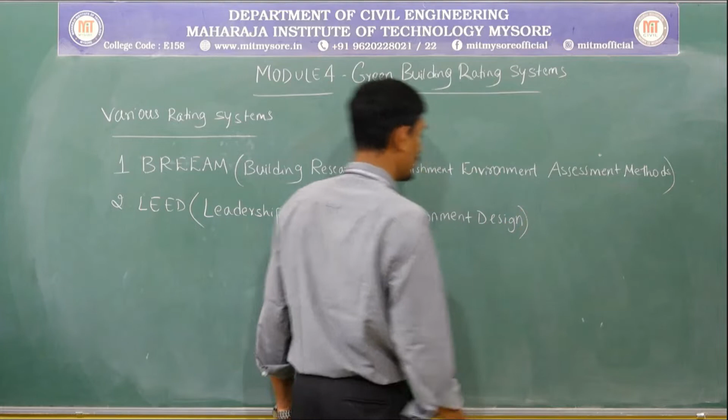Next is the very widely used assessment system in green building, that is LEED. LEED means Leadership in Energy and Environment Design. So this is the second rating system we are going to follow.

Next is Green Star. This is one more rating system we are going to follow.

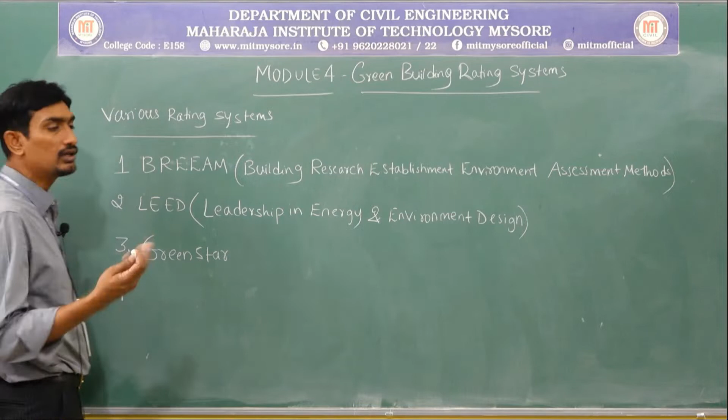These systems are globally used in green building rating. If I come to the Indian context, the rating system used is IGBC, that is Indian Green Building Council. This is the popularly used assessment method in India, and so many strategies and categories have been derived from LEED.

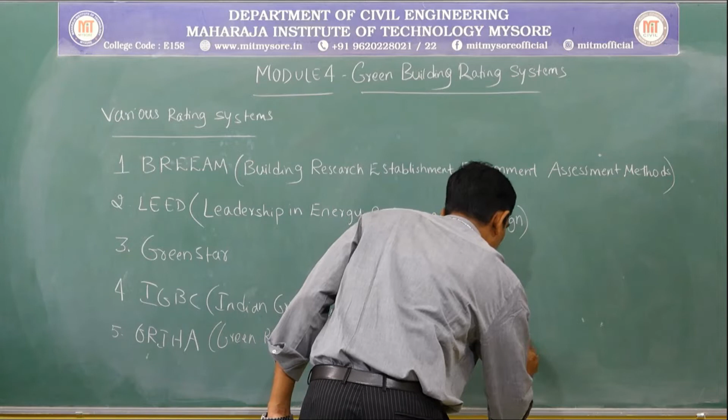The next is GRIHA. This is one more widely used assessment, that is Green Rating for Integrated Habitat Assessment. So these are the systems we are going to discuss.

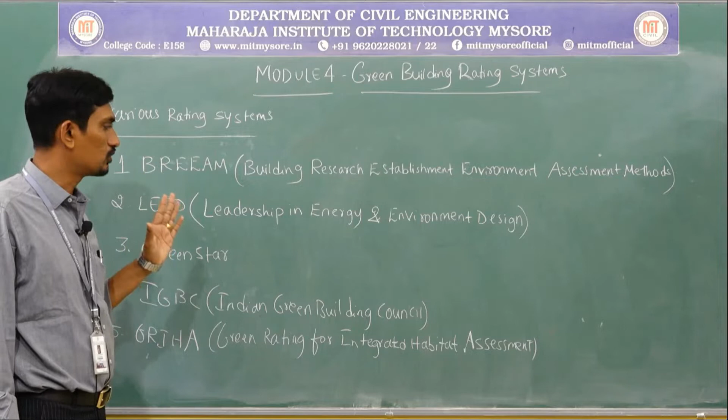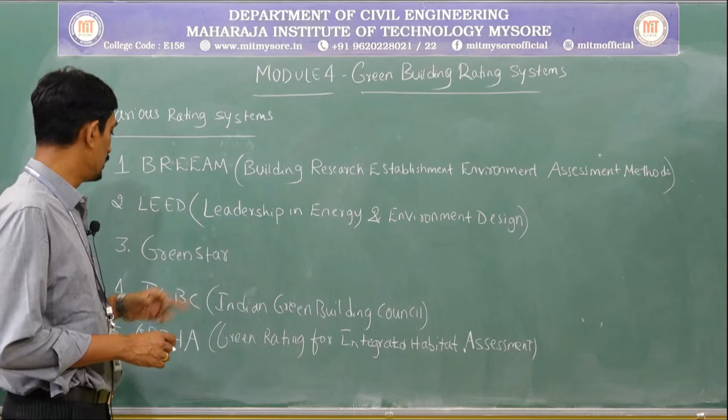The first one is BREEAM, that is Building Research Establishment Environment Assessment Methods. The next is LEED, very popularly used globally - Leadership in Energy and Environment Design, the second rating system. And the third rating system is Green Star, used in green building in some typical countries. So these three are used globally.

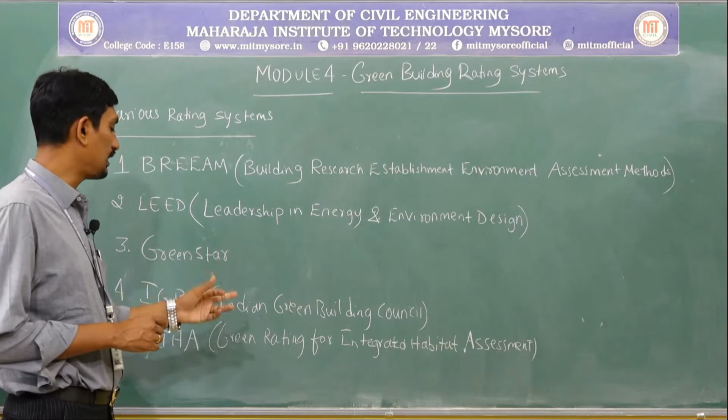Coming to the Indian context, the widely used green building rating system is Indian Green Building Council, that is IGBC. And apart from this, the one more rating system we use is Green Rating for Integrated Habitat Assessment, GRIHA. So these are the five rating systems I am going to discuss.

In this section we will start one by one, covering the principles followed by each particular rating system. Apart from these five rating systems, there are other rating systems used in other countries, like CASBEE, which is used in some other country. In Japan also they use some other standards, Japan standards. So various countries have adopted various rating systems.

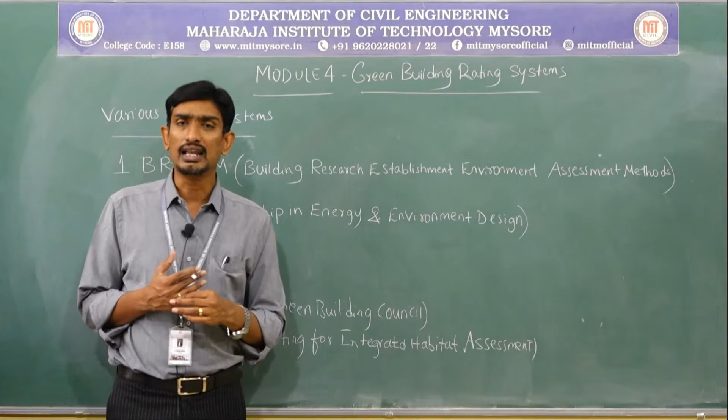The categories used to rate green buildings are classified differently, slightly changing from one rating system to another. But in general, all rating systems follow the same categories - water efficiency, energy efficiency, ecology, environment, waste management, and so on. But they are bifurcated with respect to their countries so they can rate the green building. We will discuss the categories one by one for BREEAM, LEED, Green Star, and IGBC, and how they rate the green building.

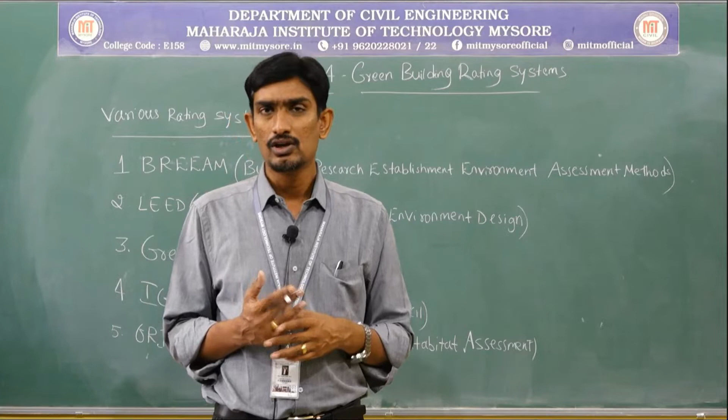So now let us discuss one by one what all the things about the rating system are. We will start with the first one.

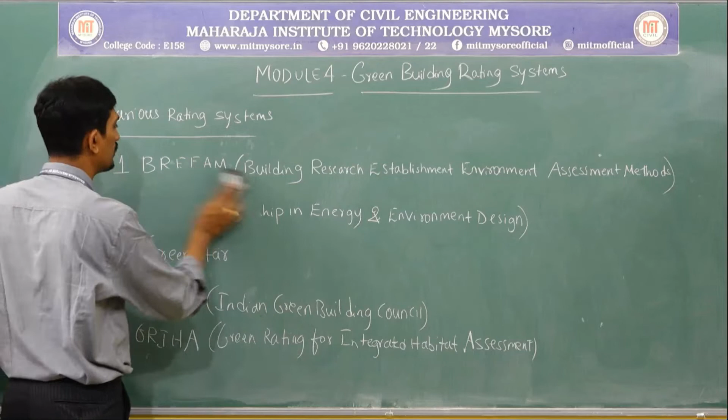The first rating system I am going to discuss now is BREEAM. This BREEAM was launched in 1990 by BRE, which means Building Research Establishment. They have adopted this rating system.

BRE is a world leading, multidisciplinary building science organization.

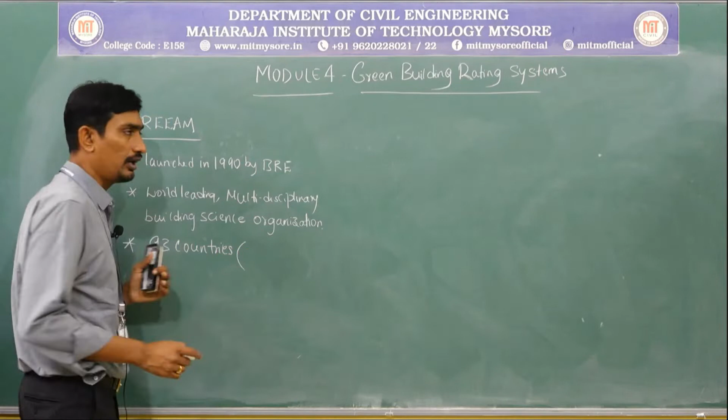This BREEAM is popularly used in various countries, almost 93 countries follow this rating system. In particular, the popularly used countries are UK, United Kingdom, European Union, and other Middle East countries.

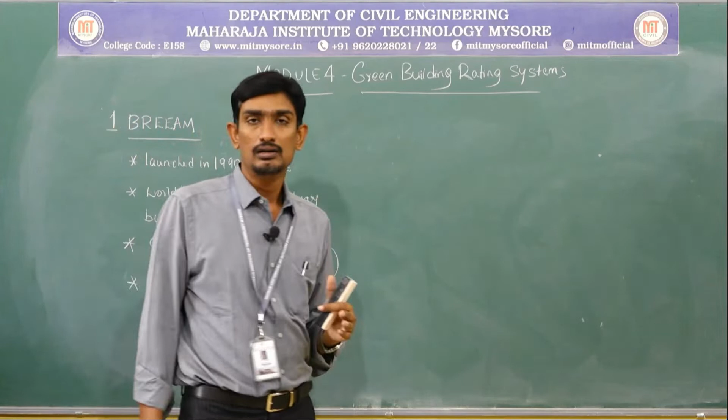Almost I can say BREEAM has rated 23,26,200 projects so far, since 1990, when they started evaluating and rating buildings. They have certified over 5,65,000 certifications. This is the amount of certification they have done.

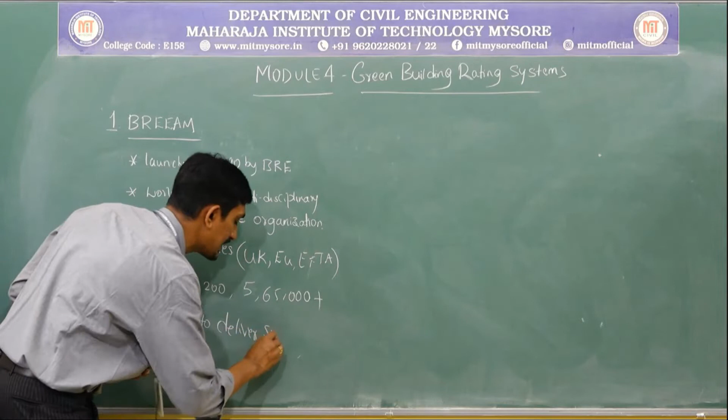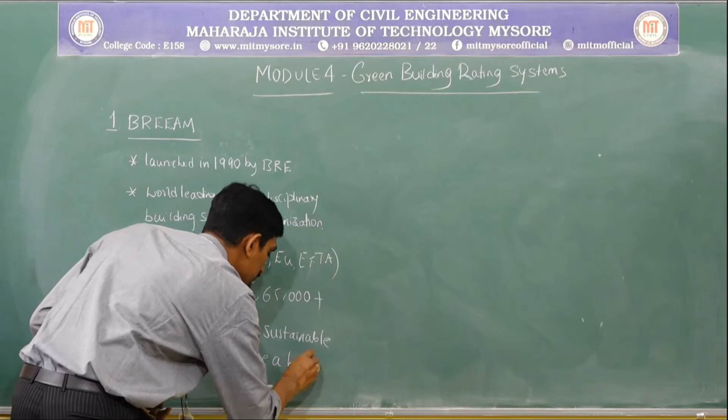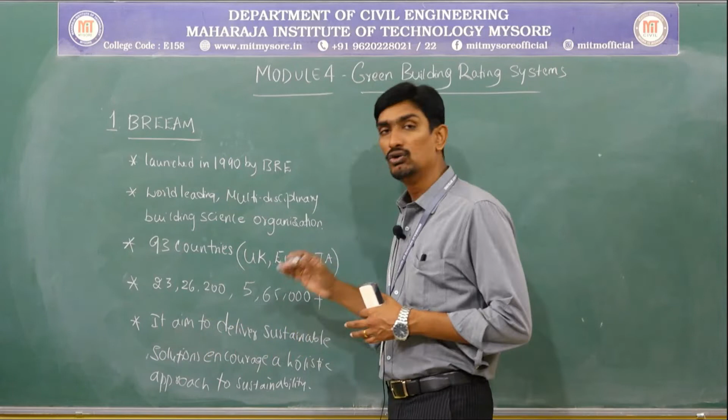Next, what exactly does BREEAM do? It aims to deliver sustainable solutions and encourage a holistic approach to sustainability, or sustainable environment. That means the BREEAM provides sustainable solutions which encourage a holistic approach to sustainability. That means I want to create a sustainable environment. When I create a sustainable environment in the building, automatically I can attain the green building concepts, and in turn rate or certify the green building in a better manner. So this is a brief introduction about BREEAM.

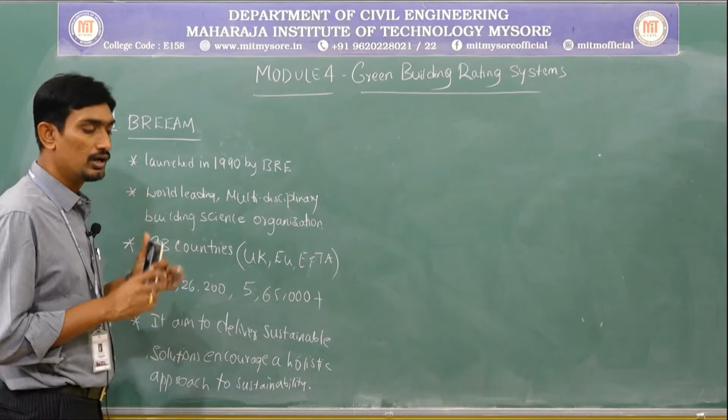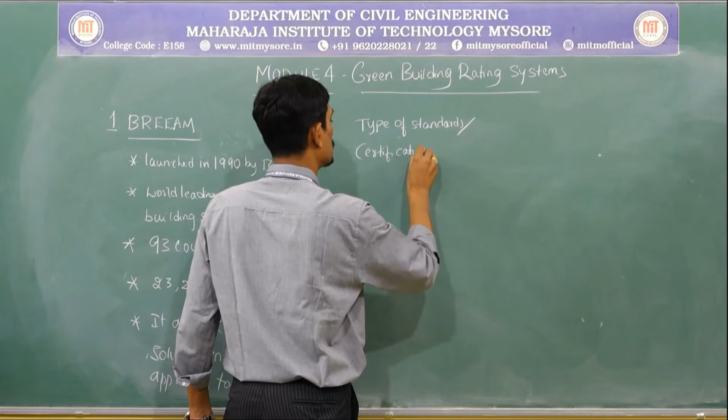Now let us look at the categories they are going to rate, and the different certification levels. So let me go with the table. They are going to classify the whole system into standardized types of standards, certifications, or rating systems. So this is the table.

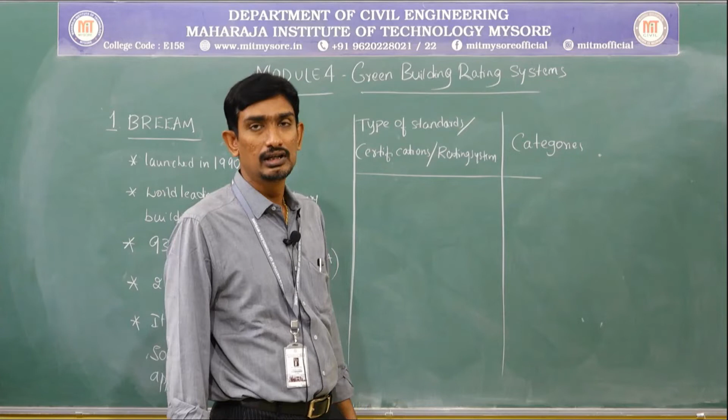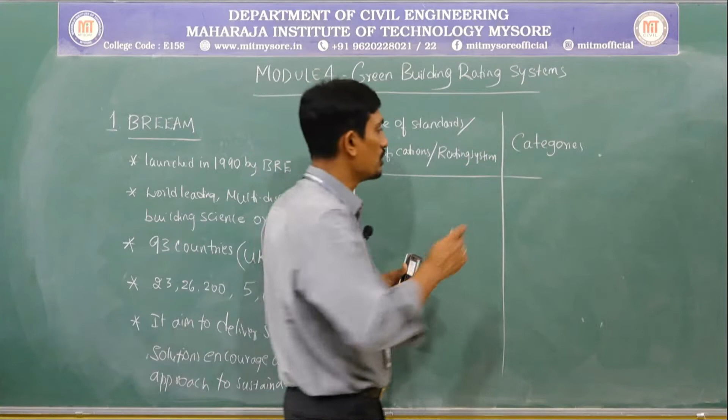Next, categories - this is very, very important. What are all the categories, or the criteria discussed in the last session - multi-criteria assessment or single attributes, categories, or various levels. What are the categories I am going to look at in order to certify the green building?

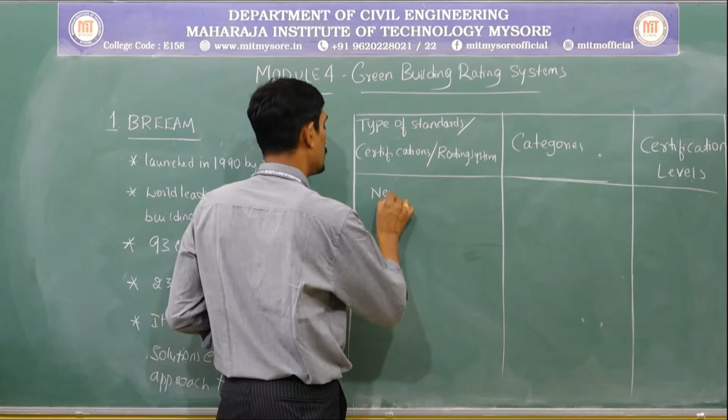Next, certification levels. What are the various certification levels? Usually the type of standards or rating systems we look at are: new constructions, new communities, in-use buildings, eco-homes, retails, courts, education, healthcare, offices, even prisons - that means jails. So whatever the purpose, we are looking into the concept of sustainable environment everywhere, creating a sustainable environment. So in that perspective, these are the various levels we look at in order to rate green buildings.

Next thing is categories, starting with energy and water efficiency - this is the first attribute I am going to look at. Next, internal environment. The very simple principle we follow here is: better the internal environment, better for the occupants. Better internal environment inside the building means occupants can feel comfortable - comfortable means they need not switch on the fan or light, they can feel comfortable inside the room. That's what internal environment means - how exactly the internal environment is inside the buildings.

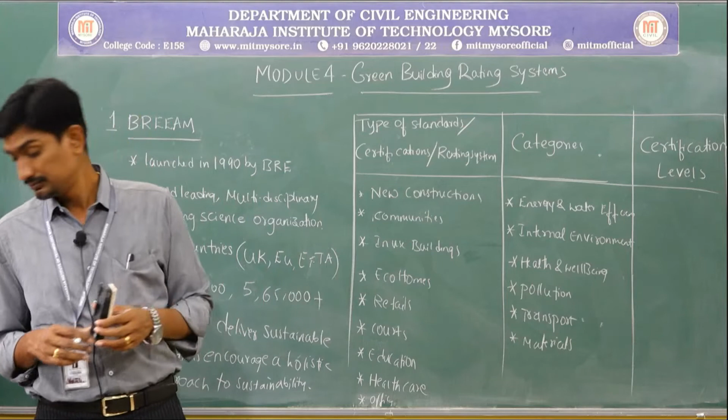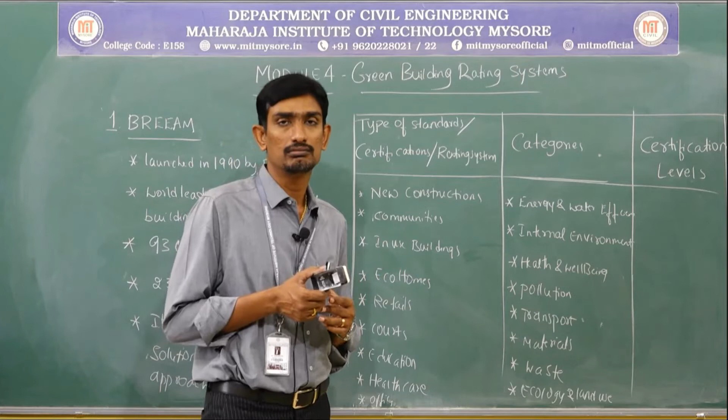Next, waste, ecology, and land use. In the last class I also stated how exactly you are going to create the boundary for the building. For example, if there is any tree on the periphery of the building, it will try to protect and reduce the heat inside the building, so that you can feel comfortable inside. Also how exactly the building has been oriented, that means the plan. So that is ecology and land use.

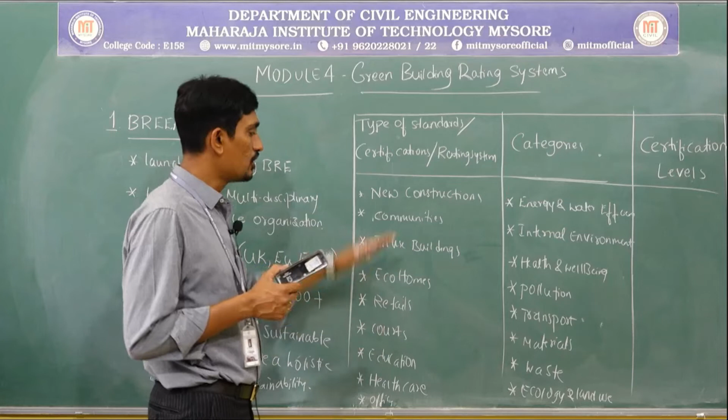So these are all the various categories I am going to look at with respect to these buildings, whether new constructions or in-use buildings, that means the buildings that will be used - eco-homes, retails, courts, education, healthcare. So in all these buildings, I am going to look at these categories. Did you get my point?

If all these categories are met, then the certification level will be better. If they are not going to meet certain standards, the certification level also will keep on reducing. So the certification level they are going to start with, the very basic level, is pass.

So they are going to certify just, okay, if you attain the criteria of some categories, then you are going to certify with pass level. Next, if something better, then I will go with good - the certification level will be good. Then if some improvement can be seen, then I can say very good - the certification level will be very good.

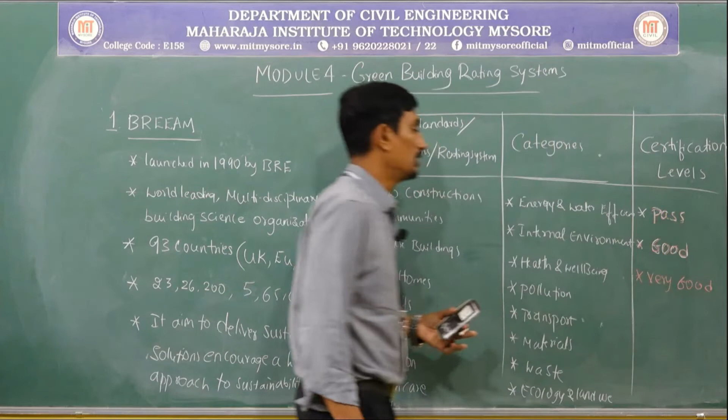Next, if still something better, then excellent. If something better than that, then outstanding. So these are the various certification levels I am going to provide with respect to BREEAM for this building, with respect to these categories. Did you get my point?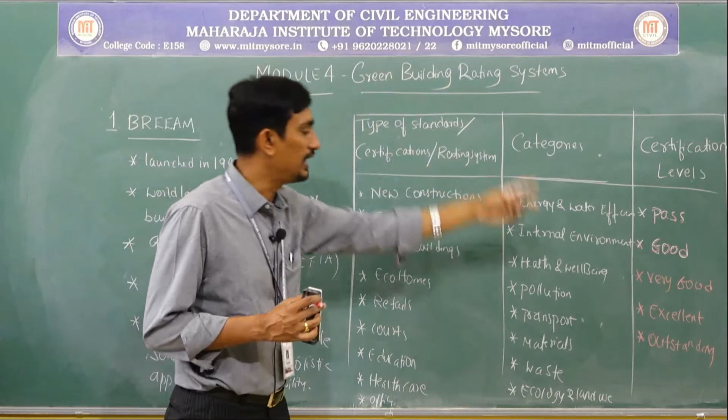So with respect to these categories, I am going to certify this building with this certification level in terms of BREEAM. BRE is the agency that has developed this table globally, that is Building Research Establishment Organization. So this particular organization has developed this.

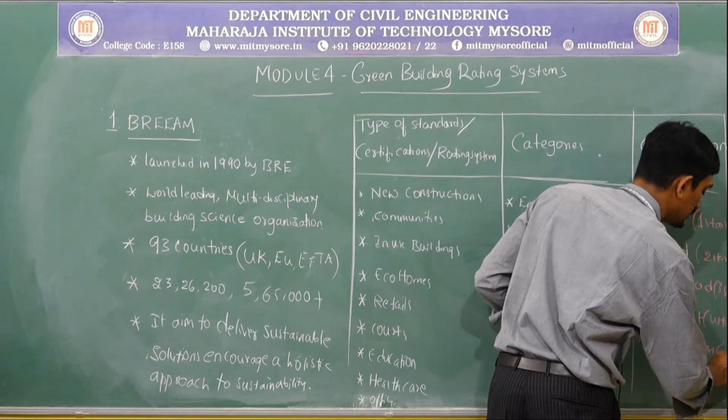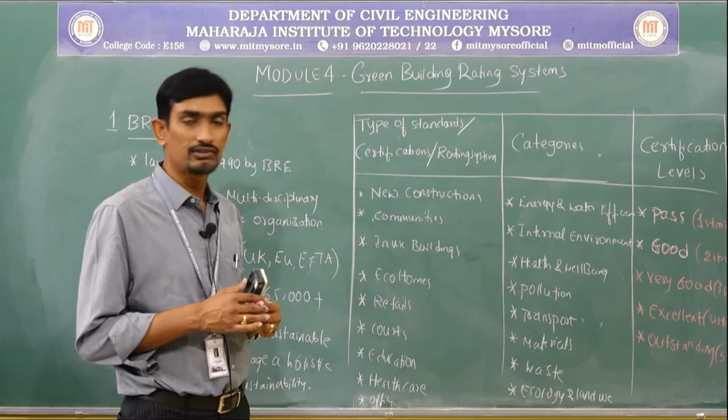Sometimes they are also going to star the certification level, like 1 star, 2 star, 3 star, something like this, 4 stars and 5 stars. So like this they are going to certify the buildings based on the BREEAM certification level. Hope the categories, the certification level, and what all things I am going to certify has been made clear. So this is about BREEAM.

Is it clear? Next, we will move on to the next rating system. The next rating system is LEED. This is the second rating system very widely used globally. Globally, many countries follow it.

Even India used to follow this LEED, though they have modified certain things and are using this rating system. LEED stands for Leadership in Energy and Environment Design.

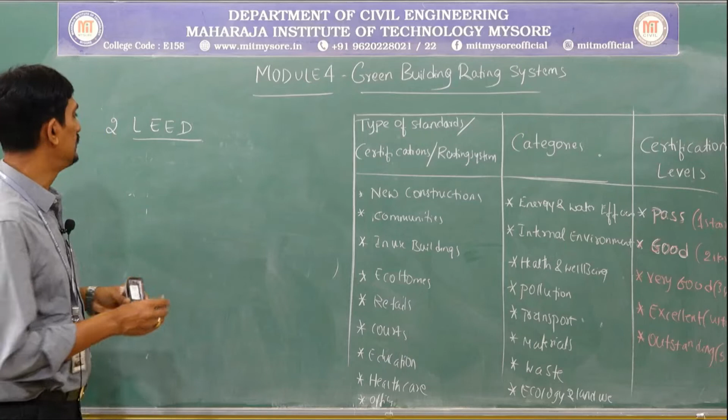This was established in 2000 by USGBC, that is United States Green Building Council. So the United States Green Building Council has developed these standards, the LEED rating system.

Next, what exactly does this USGBC do? This USGBC rates design and construction practices that continue to define green buildings.

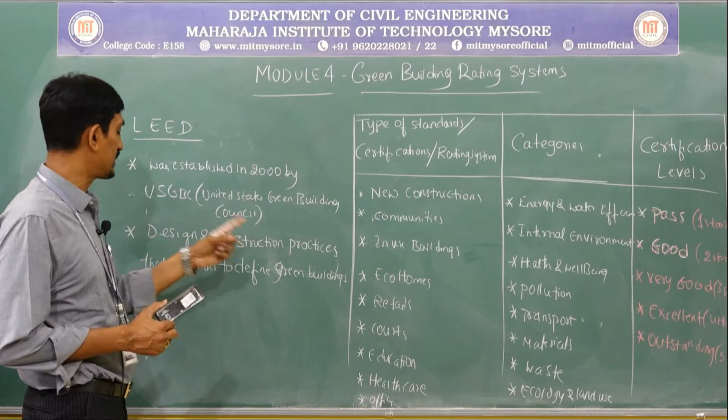This LEED, developed by USGBC, is used to rate design and construction practices that continue to define green building. That means how exactly the design of buildings has been done to meet the sustainable environment, in order to certify as green building, and how construction practices have been followed or adopted to create that sustainable environment.

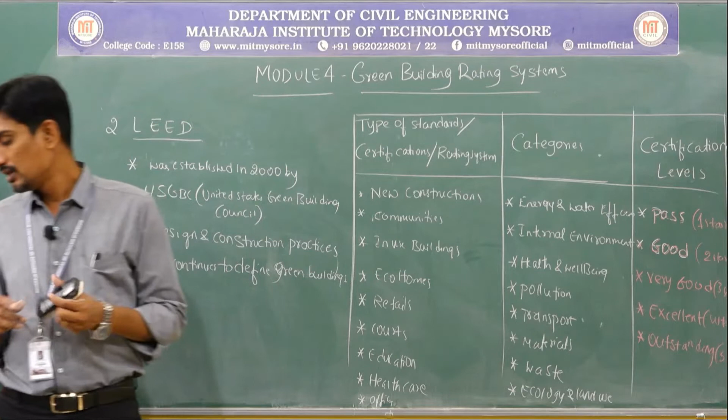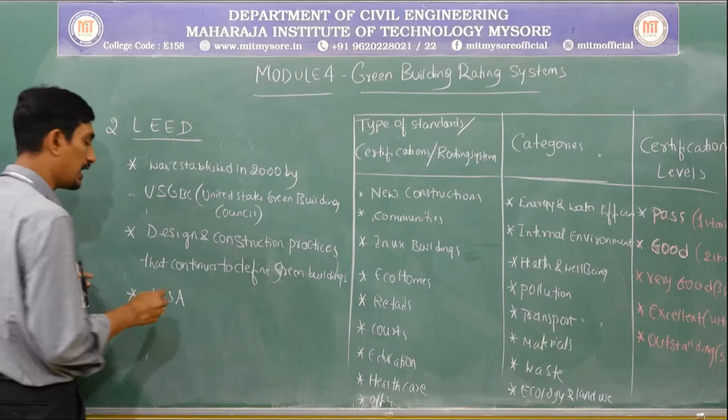This particular LEED is majorly used in the USA, in particular North America. The US Green Building Council developed this LEED, and almost 150 countries have adopted it, including India. India has also derived this LEED certification, and the IGBC, which I am going to discuss next, has its rating system derived from LEED, developed by USGBC.

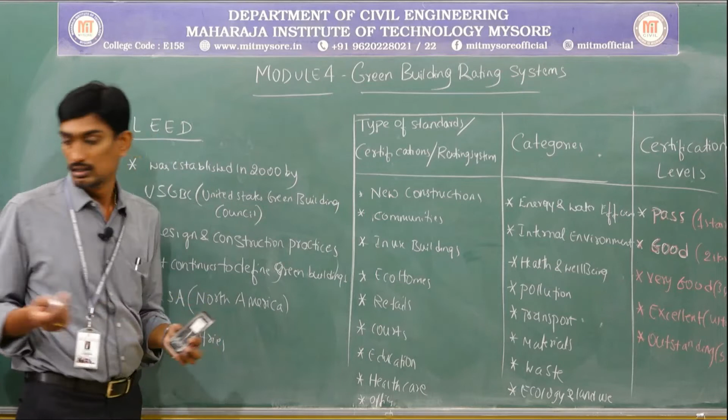Practically, almost 1,10,000 projects have been certified with this LEED certification, especially by USGBC.

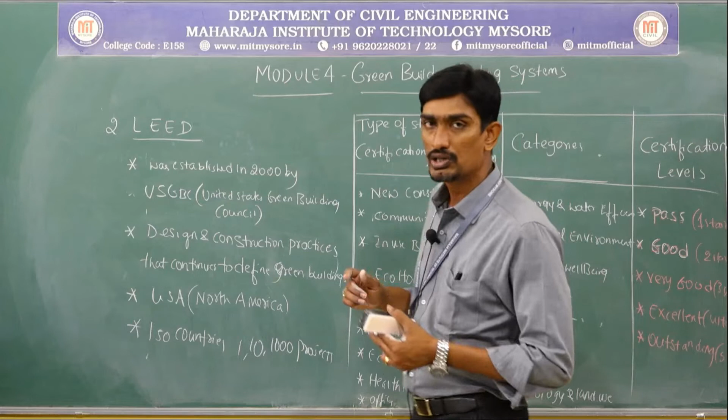One more important thing I can state is, from the latest research, almost $130 million have been kept by USGBC or USA in the budget for this LEED certification.

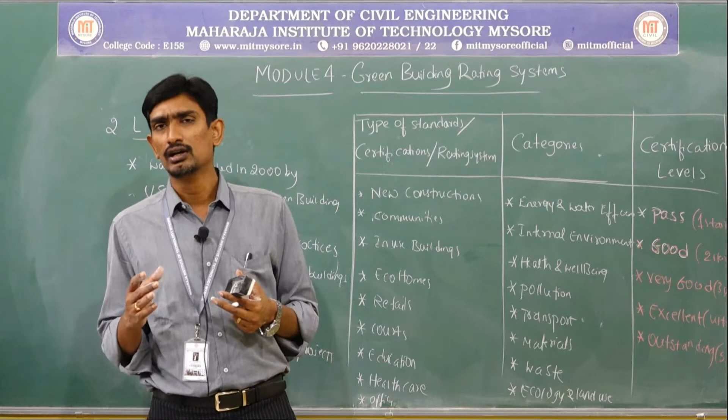Nowadays everyone is looking at how to reduce global warming and carbon emission issues, so everyone is going with the carbon footprint perspective. With this global warming reduction perspective, design practices and construction practices need to follow the LEED certification. So it is a prestigious thing for a building to get reward from the government.

So now let us go with what are the types of standards, certification, or rating systems followed by the US Green Building Council or LEED, and also the various attributes or categories and certification levels with respect to LEED. This is similar to what was stated in the earlier class, in this session also. The rating system and categories are almost in general the same, but classified with slight modification with respect to their rating system.

For example, here also new construction is one and the same. Earlier in BREEAM they used to call it in-use buildings, now they call it existing building. A slight modification, that's it. New construction and already constructed building - but in BREEAM they used the terminology in-use building. That's the modification, but the meaning is one and the same.

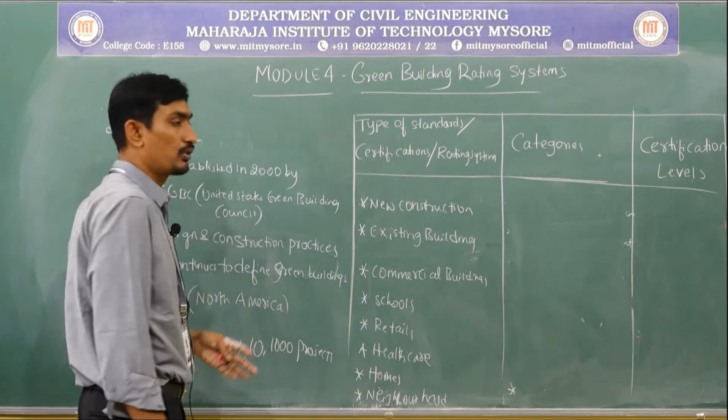In existing building, we are going to check operation and maintenance as the main thing. So type of standards in this category - LEED has been classified into new construction, existing building with operation and maintenance, commercial interiors or buildings, schools, retails, healthcare, homes, and neighborhood. These are the various standards or certification rating systems followed by LEED.

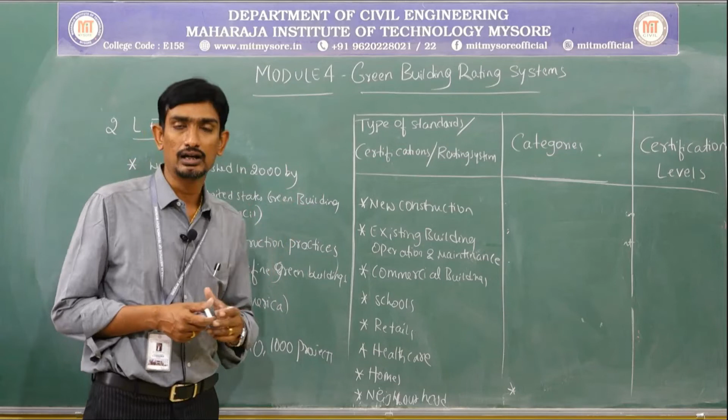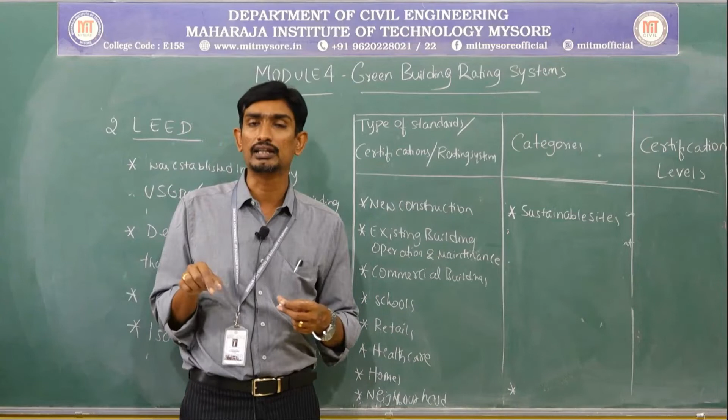Next, coming to the categories or attributes or levels which I am going to use for certification. The first category is sustainable sites - whether my boundary where I am going to construct the building is sustainable or not. That is the first perspective I look at for LEED certification. As stated in session 1, in the planning stage, from the inception itself, we need to create the sustainable environment.

When I start the assessment, from the plan itself, I look at how exactly the building has been constructed with respect to sustainable sites. The second category is the same, that is water efficiency.

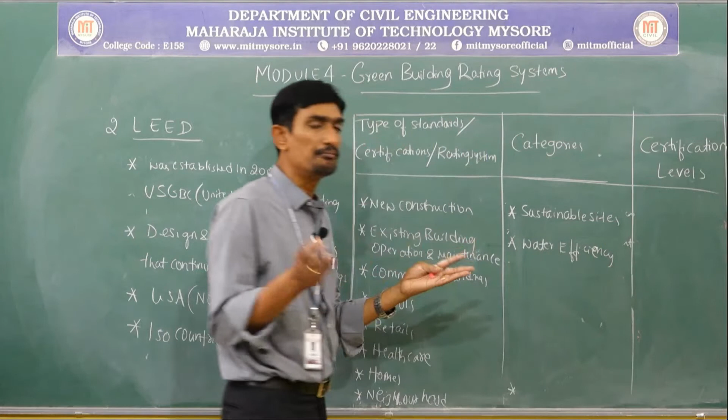Water efficiency - in BREEAM, water and energy have been combined, but here they are discretized separately: water efficiency separate, and energy and atmosphere separate. This is a slight modification. Energy and atmosphere is the third category.

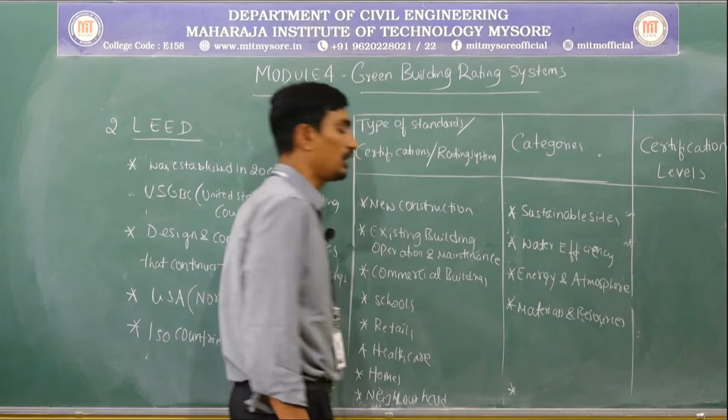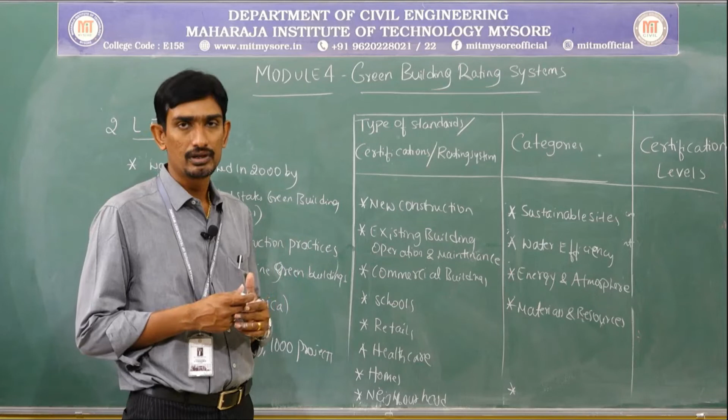Next, materials and resources - very important. I think BREEAM also states this: what types of material or eco-friendly material am I using? Am I using carbon rated materials? For example, concrete and cement - if I use a more amount of ordinary Portland cement or concrete, automatically the carbon level will be more, because concrete and cement have more carbon, so the energy level will be brought down. So material-wise we need to be conscious about what material is being used and which methodology is being used.

For example, instead of using concrete blocks or bricks - I think in module number 2 you have read about it - a very eco-friendly material is stabilized mud blocks. But people don't have confidence to use it. We need to create awareness among people about such situations, so that we can go ahead with it.

If you go with this perspective, only then can we attain a sustainable environment or reduce global warming. Otherwise it is very tough to live. I hope you have observed these days that because of this, majority of climatic changes are happening.

In newspapers they have written about the more amount of climatic changes or variations - in winter season you will feel the summer, in summer season you will feel the rainy season. These climatic variations are happening because of global warming, which is due to enormous liberation of carbon into the atmosphere, deforestation, and all these things. With this context, we need to modify the perspective of our thoughts and go with creating the sustainable environment.

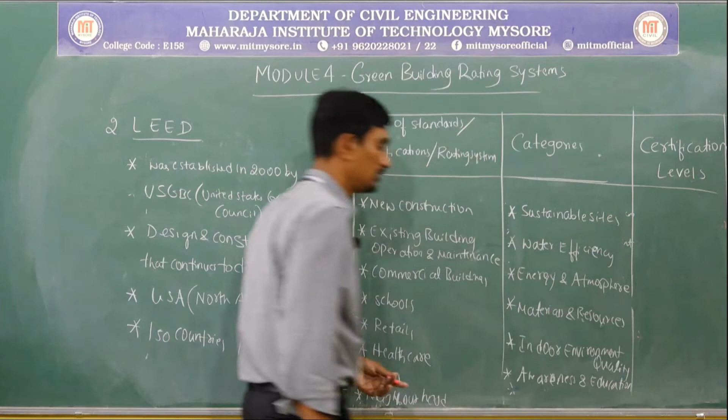Next, awareness and education - this is another thing. How aware are we of creating the sustainable environment - awareness and education. Are you aware of these green building aspects or concepts? Are you educated enough to go ahead with these green concepts? This was not there in BREEAM, but LEED used to follow this. Creating awareness and educating is one criterion - something like an oral examination to the people who have constructed the building. If I am a certified fellow from LEED, I ask questions to the person or organization that constructed it, about what materials were used, whether they are educated or aware of these things. That is what awareness and education means.

Next, innovative design.

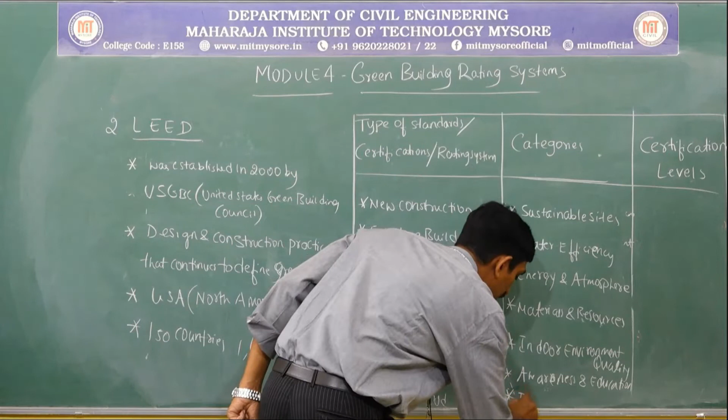What innovative design have you adopted in your building so that it attains green building aspects? For example, waste management - how have you accommodated waste management so that waste does not deposit inside the building or its periphery? How have you manipulated or modified your building for this? That is innovative design - using lesser energy, what is the maximum output you are getting? That is something like innovative design.

Next, regional priority - that is one more category I am going to look at in LEED. So these are the various categories I am going to look at.

Next, coming to the certification level. The first thing is, if I attain points of 40 to 49 points out of 100, then I can say the building is certified with green building. This is the first basic certification level, just like a pass which was there in BREEAM.

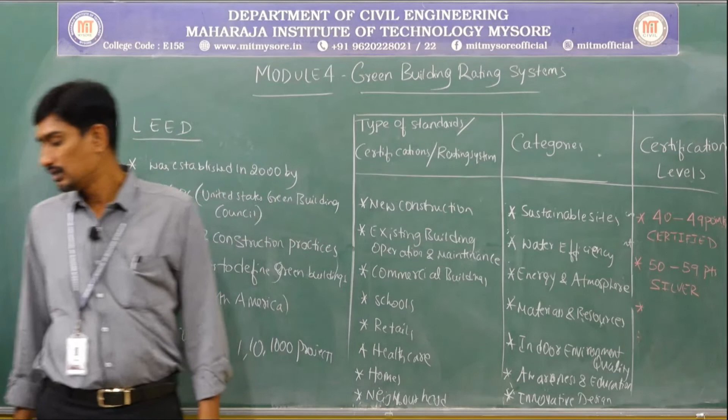Next, if I attain 50 to 59 points, then I will get silver. If I get 60 to 79 points, then I can say I have attained gold.

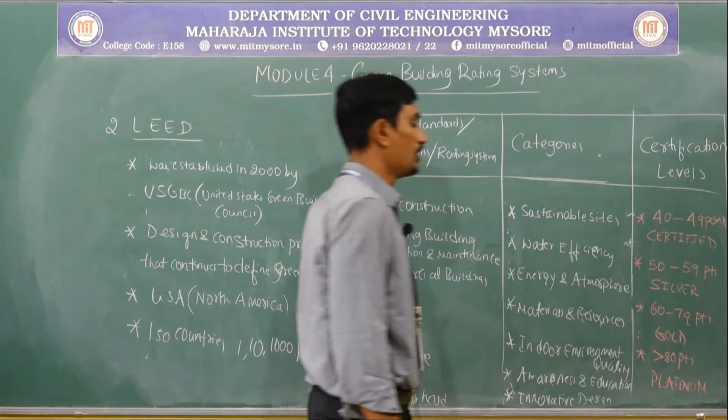If the points are more than 80, then the certification level will be platinum. This is the usual rating system, even followed in India also - silver rating, gold rating, platinum rating, like this. So these are the various certification levels. LEED is going to certify based on these categories.

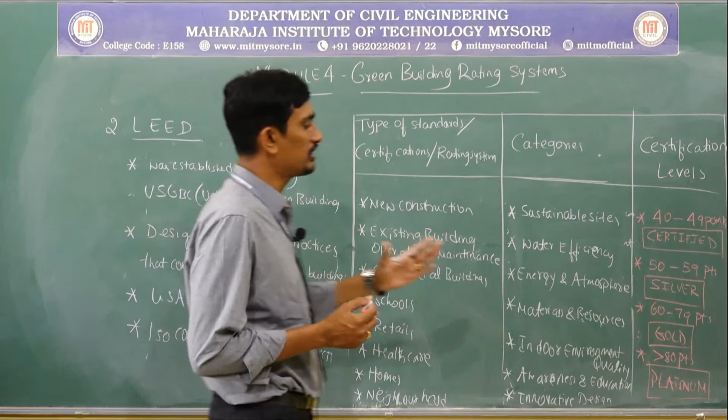Hope you understood the categories, the type of standards, the certification levels. Even in India, IGBC also almost follows the same certification level, which I am going to discuss next. Hope the concept has been cleared in LEED, that is Leadership in Energy and Environmental Design. Now we'll move on to the next certification level or rating system - the next is Green Star.

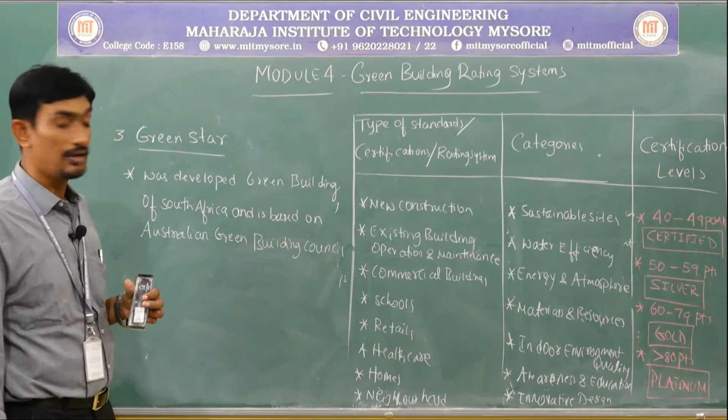Green Star - this was developed by Green Building of South Africa. In South Africa, or African countries, they used to follow this. This South African green building is based on the Australian Green Building Council.

So these tools, that is SGBC tools, the standards or methods, used to provide the property industries with an objective of measurement for green buildings that will correlate with respect to industry standards. So this is about the Green Star.

Now coming to the type of standards or certifications - we will start with the first thing: design and built environment. This is the first type of standard, where Green Star developed by Africa - South Africa, Australia, New Zealand, all these countries almost follow this Green Star certification to certify green buildings.

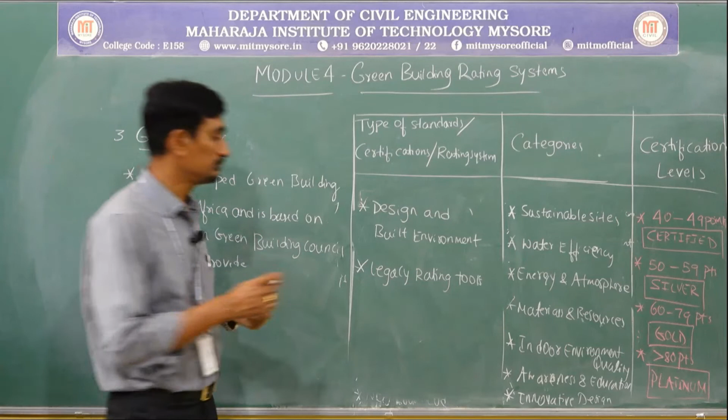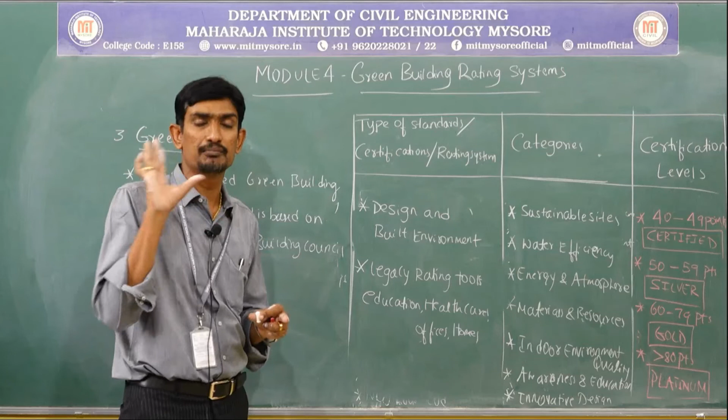The next thing is legacy rating tools - tools that provide priority to the property industries, such as education, healthcare, schools, offices, homes, etc. So these are the two types of standards, classified into very simple standards: one is how exactly the building has been designed and built to create a sustainable environment.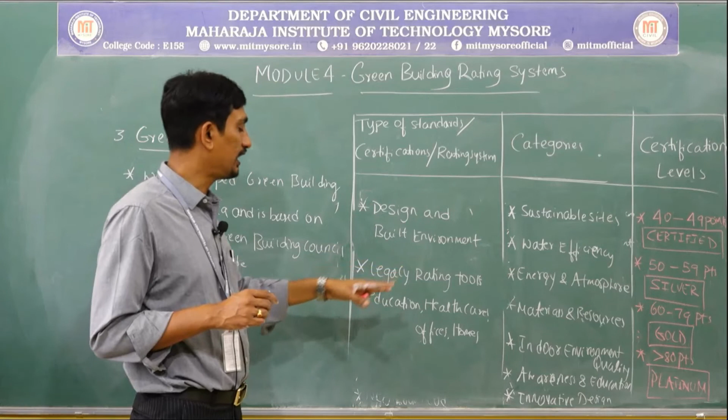Next, legacy rating tools with respect to property standards - education, healthcare, offices, homes, etc. Now coming to the categories.

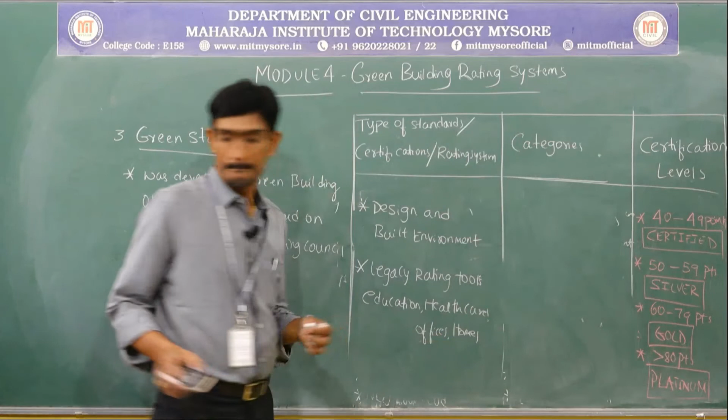Coming to the categories, the first thing is management. It has been generalized—not said as waste management, water management or energy specifically, but generalized management. That means management of water and energy, both things.

Next is indoor environmental quality, the one and the same which we discussed in LEED also; the same thing will be followed here as well.

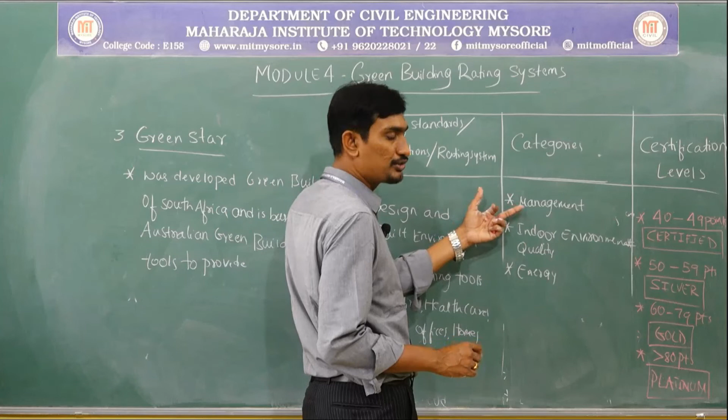Next, energy. Now energy has been separately categorized here—water management and waste management, and energy is separate, that is, energy efficiency or energy.

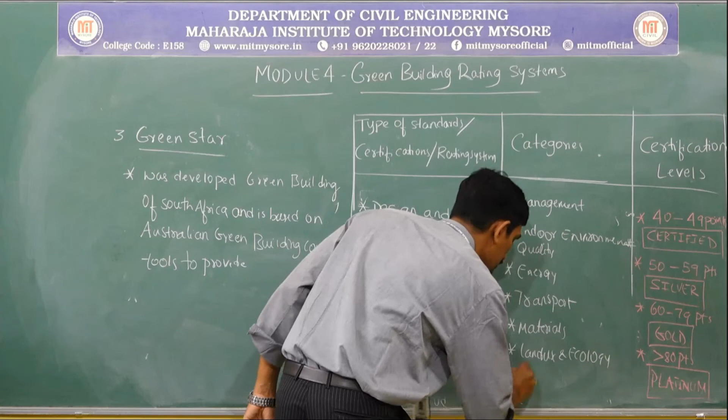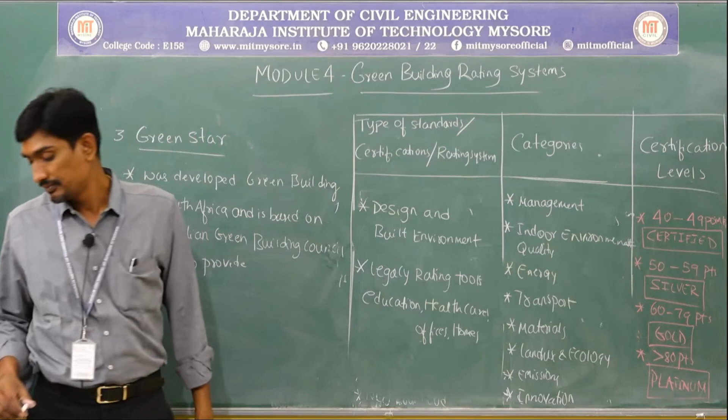Next, transport, materials, land use and ecology, emissions, and innovation—what innovation you have followed in the green building—and governance design. So all these are the various categories which I am going to look at with respect to the Green Star.

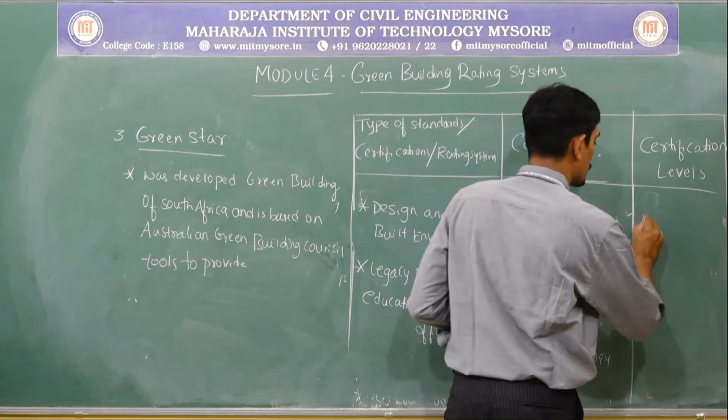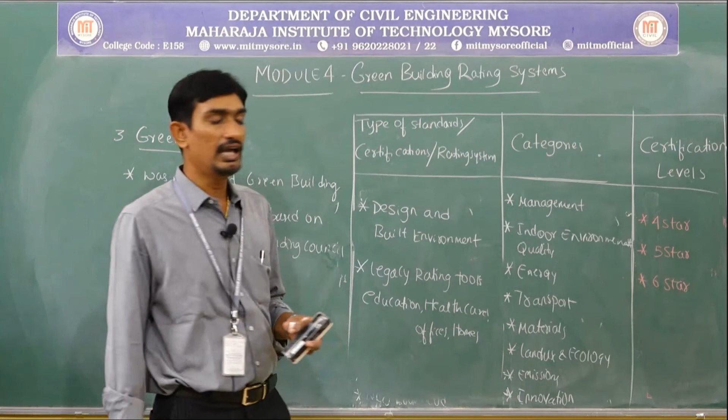Now coming to the certification levels. The certification levels are very simple: 4-star, that is the basic level certification given by Green Star, that's why the name star. Next, 5-star green building, the next level. The next is 6-star. So these are the various levels of certification followed by Green Star.

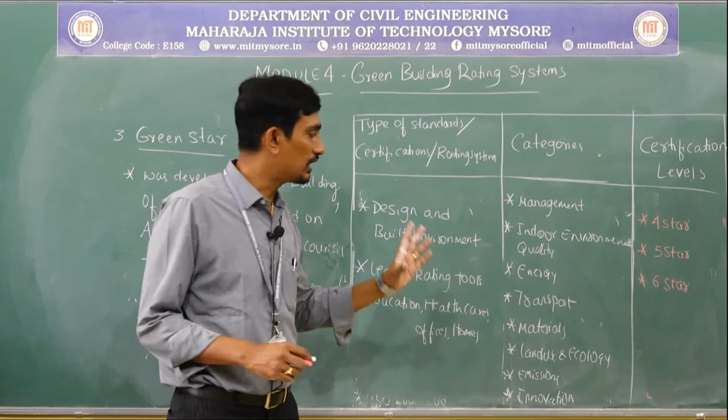These certify standards with respect to categories like management, indoor environmental quality, energy, water, transport, materials, land use ecology, emissions, innovations and all. Did you get my point? So these are all the various strategies or categories I am going to look at with respect to this.

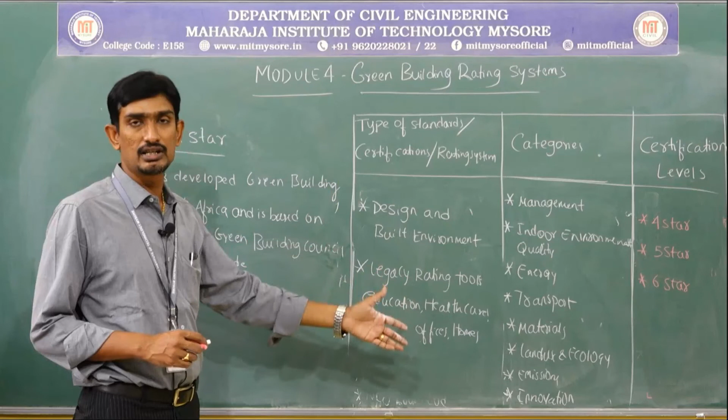Education buildings, healthcare, hospitals, offices, residential buildings—whatever it may be—are assessed with respect to these categories. If all these categories are met by the building, I am going to certify it with 6-star. If something is missing, 5-star. If many things are missing, I will go with 4-star, depending upon the certification levels.

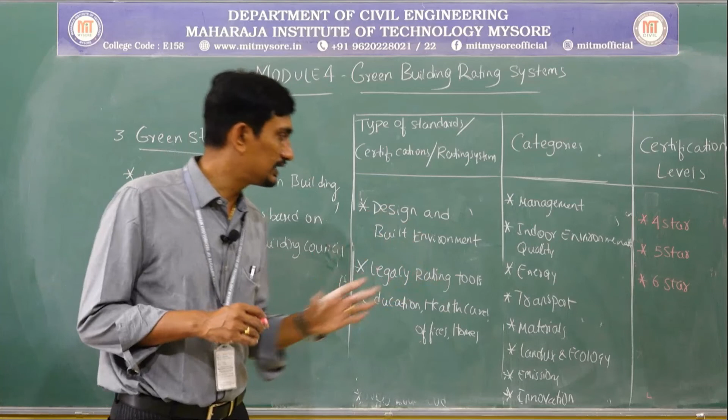Is it clear? So this is about the certification system followed with respect to the Green Star, which was developed by the South Africa Green Building Council, based on the Australian Green Building Council. I think it is also followed by New Zealand and most African countries. Hope the concept is clear. So these are the 3 rating systems followed globally.

Today, in this session, I started with the BREEAM certification, popularly followed in the UK, European Union and so many countries. Later I moved to LEED, which is popularly used throughout the world, even in India—the LEED certification, developed by USGBC. The third one is Green Star, developed by South Africa. So these are the 3 rating systems followed by various countries.

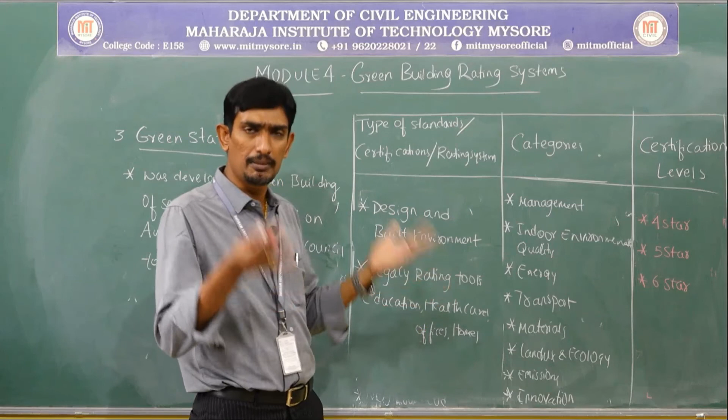But in general, if I look into green building—water efficiency, how exactly you use the land, the material, the resources, the water, waste management, everything—in general it is the same, but designated in a different way, that's it. Did you get my point? CASBEE standards, Japan standards—we are not going to discuss those in this particular session because of this concise module.

In the next session, I am going to talk about the rating system with respect to the Indian context, where you can become a certified green building consultant also. How exactly you can become one, that I am going to tell you in the next session. Hope this session has clarified the concept discussed in session 1.

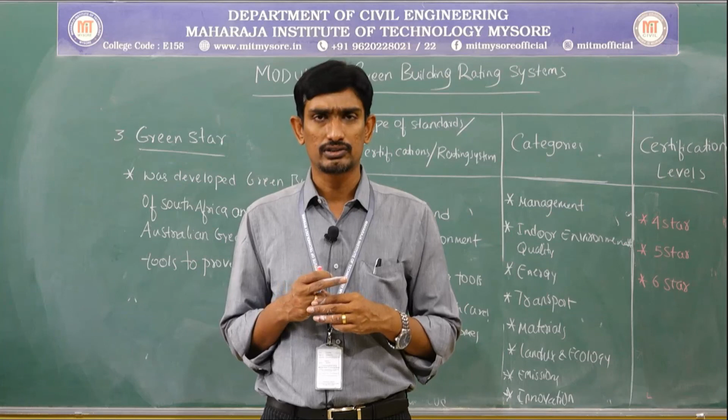I mentioned the different rating systems—these are the 3 different rating systems followed in various countries. In the next session, I am going to talk about the rating system followed in India with respect to the Indian context. Is it clear? Hope this session has clarified and helped you understand the concepts. Thank you very much for listening.